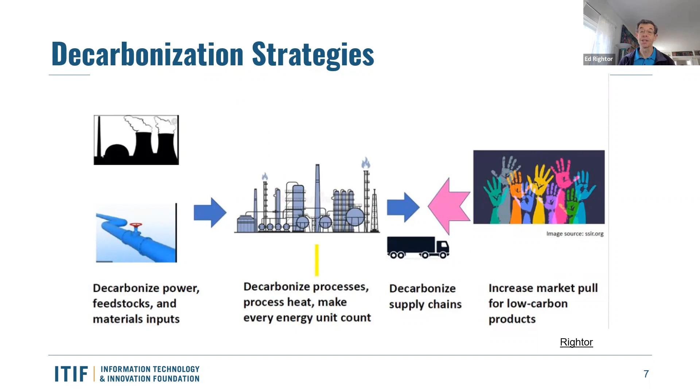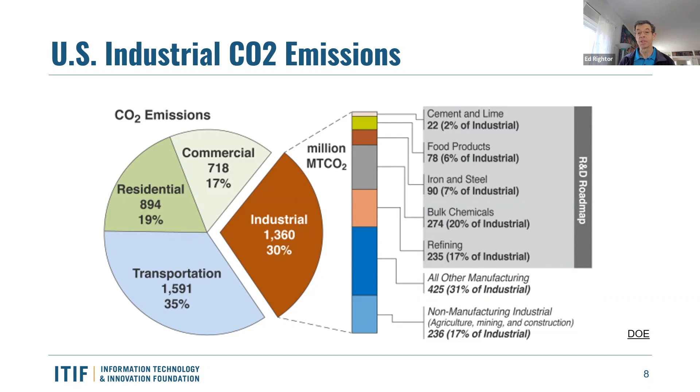Next slide, please. So in the industrial space, industry is important — it emits about 30% of the greenhouse gases nationwide. In that space, you can see in the details to the right the industrial segments that account for those large portions of the greenhouse gas emissions from industry. Next slide.

So, 4 common pillars one can think about in this space for decarbonization: the first is energy efficiency and associated materials efficiency. Second is energy substitution or fuels substitution. Third is low carbon fuels and feedstocks — that's typically where hydrogen fits. And fourth is mitigation of CO2 that perhaps one can't address with the other three pillars. Next click — we'll focus today on the energy substitution, as that's where electrification fits in. Next slide, please.

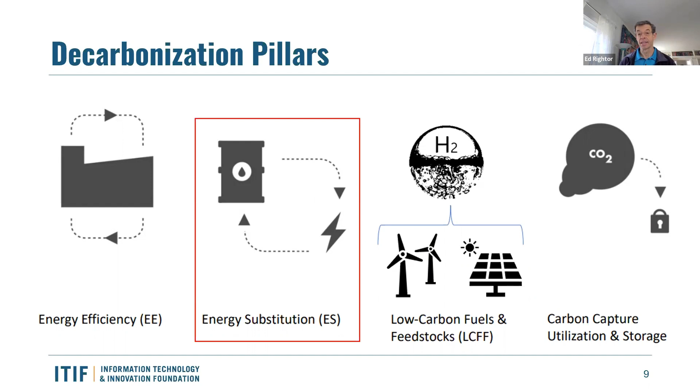So in industry, process heat is, as I mentioned, the big opportunity, not only in the generation of process heat but in some cases the machine drives. Process heat accounts for 60% of on-site industrial energy use. Hence, for decarbonization across all heavy industries, it is the big cross-cutting opportunity.

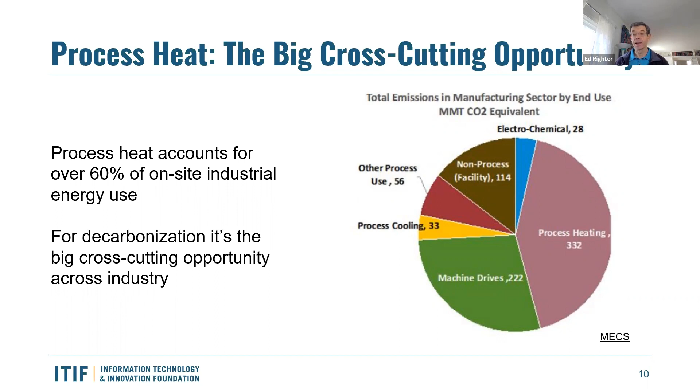Process heat has a number of different process ranges or temperature ranges, as you can see on this slide. Depending on your industry, there's a fair amount of process heat that's under 300 degrees C, and it's that range which is particularly interesting for industrial heat pumps. You can see in chemicals, petrochemical, coal, paper, and food, there's a fair amount of this process heat that's under 300 degrees C, and in fact a fair amount under 200 degrees C.

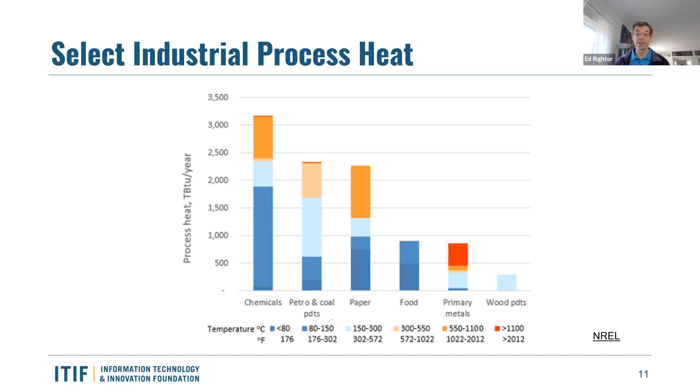This is a key opportunity then for industrial heat pumps. These heat pumps are like the ones you'll find in homes, except they're on steroids because they can go to much higher temperatures, in the range of up to 200 degrees C, where current commercial systems are. Heat pumps lift the temperature to a higher range, which could be of greater applicability in industry.

Now, you can use either electricity or waste process heat. The opportunity to use both or either of those aids decarbonization, as that electricity can come from low carbon sources like wind and solar. The heat delivered versus the electricity used can be a ratio of 2 to 5 or more, providing great return through something called the coefficient of performance for the use of electricity in industrial heat pumps.

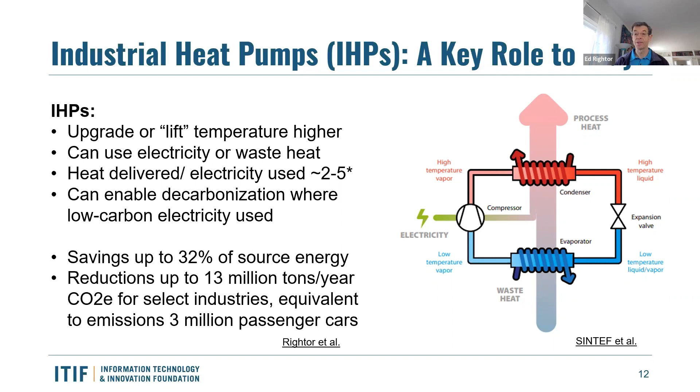Some prior work shows that savings of the source energy, whether natural gas or electricity, can be upwards of 32%. The reductions across some of the sectors we just looked at for industry, such as chemicals, pulp and paper, and food, can be up to 13 million tons a year of CO2 for those select industries. That's equivalent to about 3 million passenger cars. So it's significant.

The Department of Energy has recognized this opportunity to address decarbonization via industrial heat pumps. In addition to the DOE Heatshot, which looks to reduce CO2 emissions from process heat by large amounts by 2035, they also have supported the Advanced Industrial Facilities Deployment Program, a large $5.8 billion program to demonstrate transformative technologies at scale. With that, Arun is going to tell us a lot more, and I'll hand it over to him.

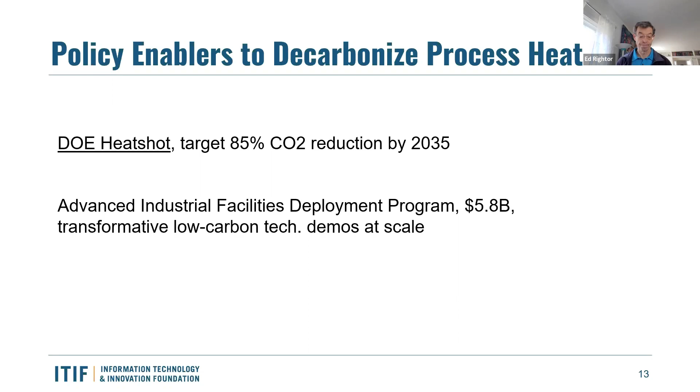That opportunity that Ed just mentioned, the Department of Energy is calling this an unprecedented opportunity to lead the world in the next industrial revolution, and that industrial revolution, of course, is industrial decarbonization.

This opportunity is funded by the Inflation Reduction Act, and it's providing large awards. The minimum award size is 75 million, and the maximum award size is 500 million. I should state I'm specifically talking about topic 2. There are multiple topics and opportunities in this grant, and this talk is focused on the one suitable for industrial heat pumps.

The grant has a 50% federal cost share, which means the grant will cover 50% of the project costs. The use of funds is to fund multi-site, cross-cutting technology demonstration projects to reduce or eliminate greenhouse gas emissions. I'll talk a little more about that.

So what technologies qualify here? The number one goal is that the Department of Energy is trying to increase the competitiveness of American manufacturing through greenhouse gas emissions reductions. First and foremost, technologies and grant proposals must significantly decrease industrial emissions, and this opportunity is specifically targeting hard to decarbonize industries, including chemicals, pulp and paper, and food and beverage, among others.

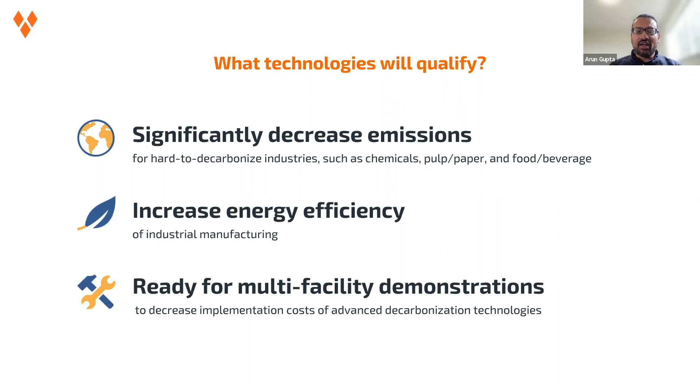Related technologies will increase energy efficiency, and they're looking for cross-cutting applications, technologies that do the most good for the most amount of people. They're not looking for specialized one-off technologies, but rather things that can be demonstrated in multiple facilities and ideally multiple industries. Ultimately this opportunity is looking to drive mass adoption and drive scale, decreasing the total installed cost and implementation cost of these advanced decarbonization technologies through at-scale demonstration.

So other grant priorities: they're looking to install commercially ready technologies. This is not for earlier stage research and development, which the Department of Energy has other funding opportunities for. This is for commercial readiness. And they're looking to benefit local communities, which includes improving air quality and providing local jobs.

We talked about multi-facility retrofits and reduction in greenhouse gases as well. So the DOE funding process is essentially a two-stage funding process. The first stage is a concept paper, due April 14th. I should state these deadlines are Skyven deadlines to give us time to put together a final application before submission to the Department of Energy. So the Department of Energy's dates are a little later, but we want you to remember these dates because they're the dates we need to work with you on this.

After the concept paper, the next stage is the full grant application. We need to work with you by mid-July on that. And then the Department of Energy is expecting to give awards out this winter, so you can expect December of 2023.

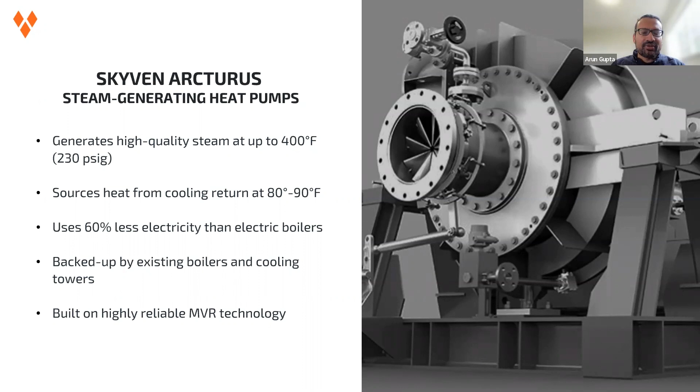So the question is, how will the Skyven Arcturus heat pumps address the grant priorities? Well, first of all, they significantly decrease CO2 emissions. The grant is looking for at least 50% reduction in CO2 emissions for the facility, and this technology does achieve that, again, by reducing or eliminating the need for natural gas boilers. And of course, it increases energy efficiency.

This is a waste heat source heat pump, and rather than rejecting low temperature heat, just throwing it away into the atmosphere, this technology allows the plant to capture that heat, upgrade it, and reuse it. So this is really a form of heat recycling.

We talked about why this is ready for multi-facility demonstrations. It's backed up by existing boilers, and outside of the cooling water return and the steam header, this technology operates completely outside of a plant's process. That's really important because many industrial heating technologies require unit level process integration, meaning changes to a plant's process, which is exceptionally difficult to do at scale in the industrial sector because of the need for exceptionally high reliability.

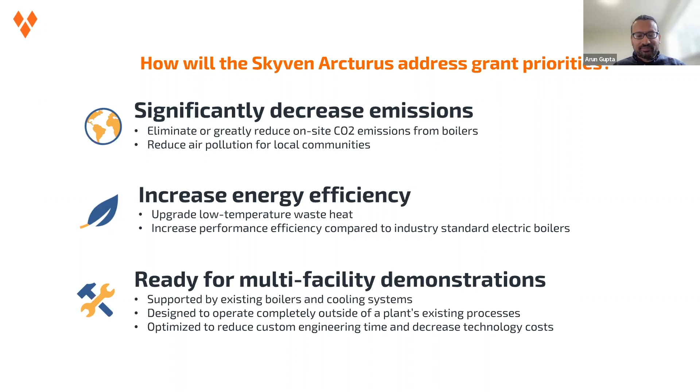So essentially, in our view, it's basically a non-starter to change unit processes, and that's why we're addressing this opportunity with a technology that lives outside of the plant's process. Okay, second reason to work with us: we've got significant experience with grants and funding.

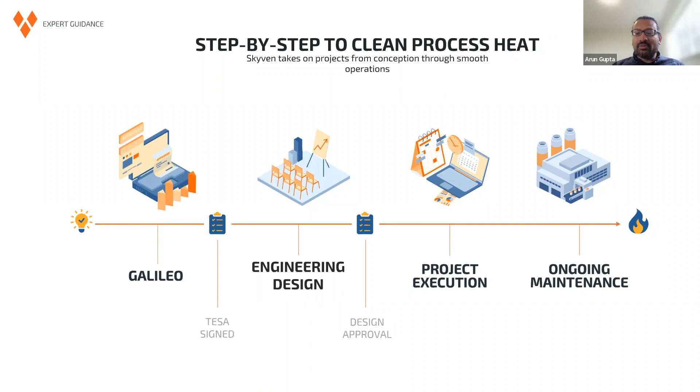The federal government is providing a 50% cost share, meaning the federal government will pay half the project cost, and Skyven will step in and cover the rest. We're putting together a portfolio of multiple projects across multiple companies and multiple industries to address this award opportunity. We encourage you to schedule a call with us today so we can get into more details.